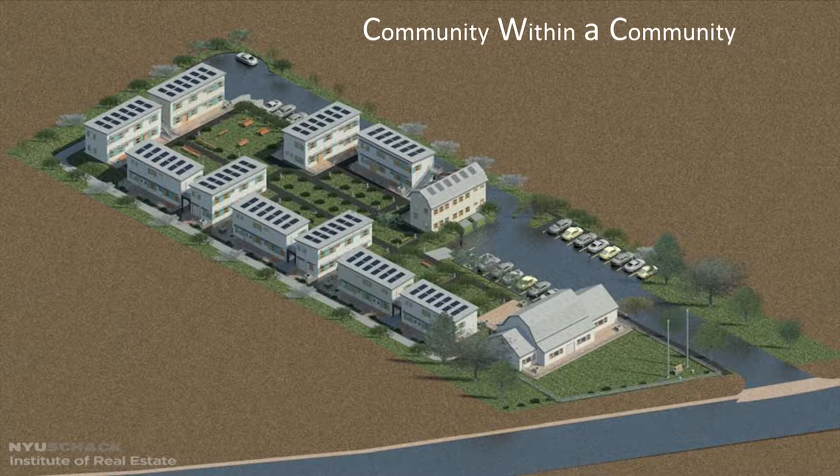So let me get started. We designed a community within a community, the DeBaun Veterans Community. The goal here was to provide something that would be not only beautiful aesthetically, but also create a public and private entity. While doing that, we also wanted to take three things really in mind, what we call a triple bottom line: social, economic, and environmental impact.

In terms of public to private, the DeBaun House is an existing structure dating back to 1770. We wanted to preserve and renovate it, having it as a community facility where organized events could happen, where the veterans can use it, and where the American Legion Chapter 269 would have a beautiful new home for their meetings. So that's the DeBaun House.

Next is the Recreation Center, or multi-purpose facility. It's going to have a small office for two caseworkers, a small storage facility for veterans to put their belongings, a classroom for essential skill development classes, a computer lab, and a small lounge area where they could watch a ball game together. Veterans can come together in one place.

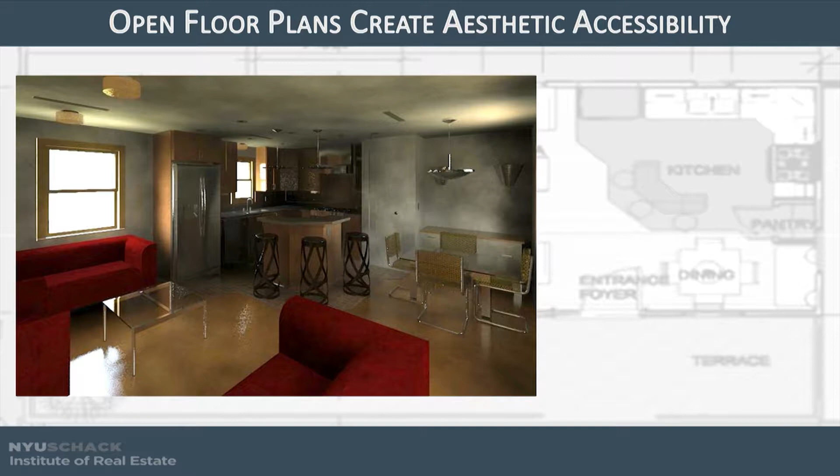I'll go into the interior. We provide ideal units with interior space management, fewer interior dividing walls for better distribution of natural light and cross ventilation, an open kitchen concept that allows accessibility to components and usage, and ideal ADA design components in bathrooms for wheelchair users, including wall mount sinks, close coupled ADA eco toilets, and ADA bathware fittings.

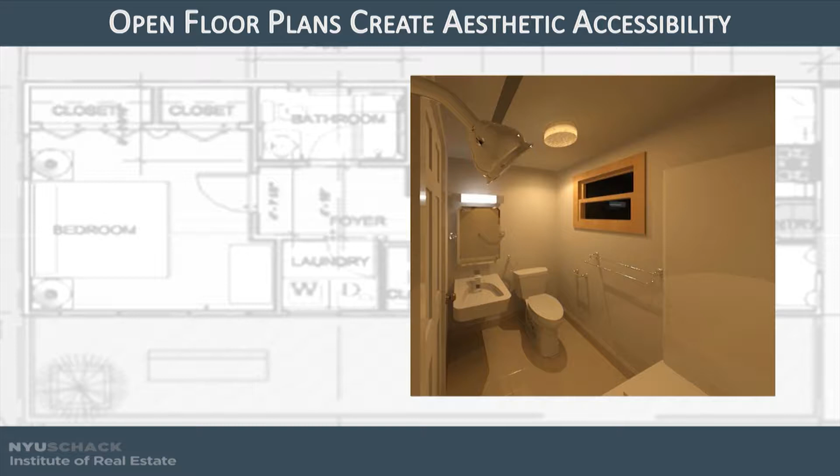The open floor plans and modern design features give the units ease of use for residents, with cross ventilation in units with standard living space. Now I'm going to hand over to Aaron to speak about the operations.

Because we are dealing with veterans, while developing the conceptual ideas for this project, it was hard to imagine what these people need first. We had the opportunity to speak with Colonel Tom Griffin, who does veterans housing in California. We found him and interviewed him, and he told us we've got to get back to the basics with these veterans. With his inspiration, we were inspired to create a multi-phased program toward self-sufficiency for the veterans who will be living here.

So we started at the DeBaun House. There are a few small things on the DeBaun House renovation that will require some help.

And for the veterans who are able to work on it, under the assistance of veteran contractors, they'll be able to recreate the porch the original house had, which we think is really neat.

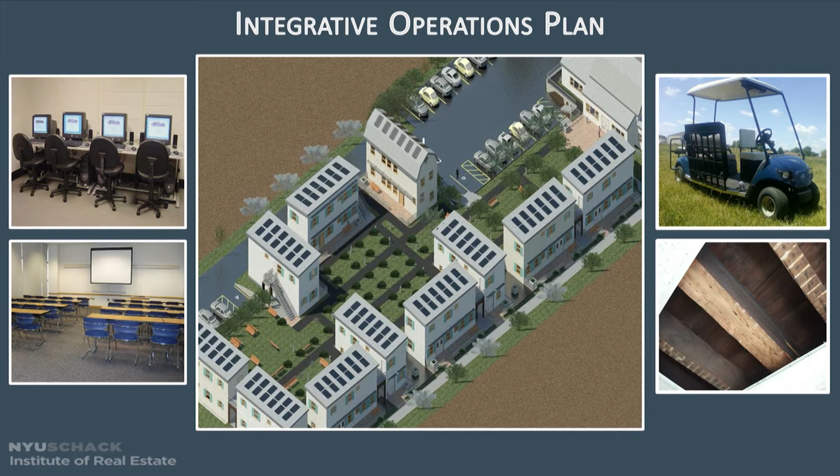In regards to occupying the space, we did have an additional unit here which we removed. We didn't want to put them together and cluster them up like army barracks, because we felt that would be a disadvantage in terms of recuperating. We wanted them to feel like it was their own home, with privacy, but also accessibility to a large public space.

You mentioned the staffing would include 2 social workers. What organizations would you imagine partnering with in terms of getting services to residents? And do you also anticipate a private property manager in addition to the social work staff? Yes, I actually forgot to mention that.

There were 3 employees that we hired: 2 social workers, one part-time and one full-time. The full-time worker would reside in the renovated DeBaun house. The upper floor is actually living quarters, so to save on cost, we would renovate that, and instead of providing a full salary, we would subsidize their salary for living wages. And another part-time worker.

In terms of operating subsidies, which we weren't able to touch on due to time, we looked at the VASH voucher program as well as Section 8. We came to the notion that if we allocated 10 vouchers each, that could help with full-time staffing as well as rental subsidies. We would also have a part-time repair person, a super. We did work that into our numbers, and that's all in the pro forma.

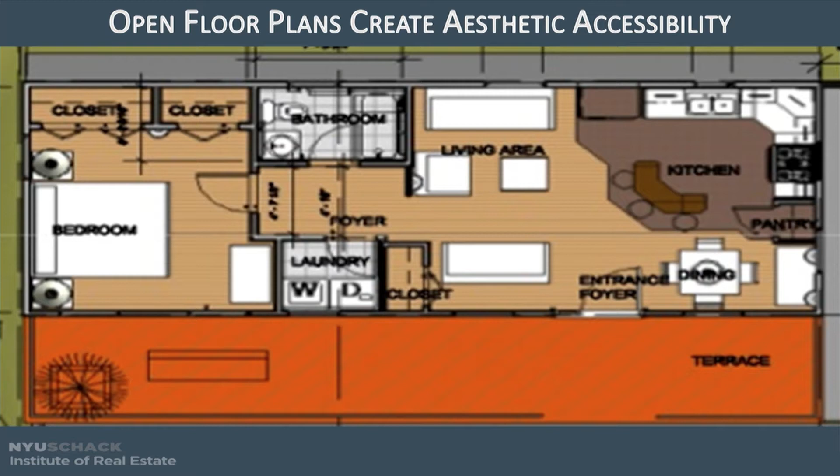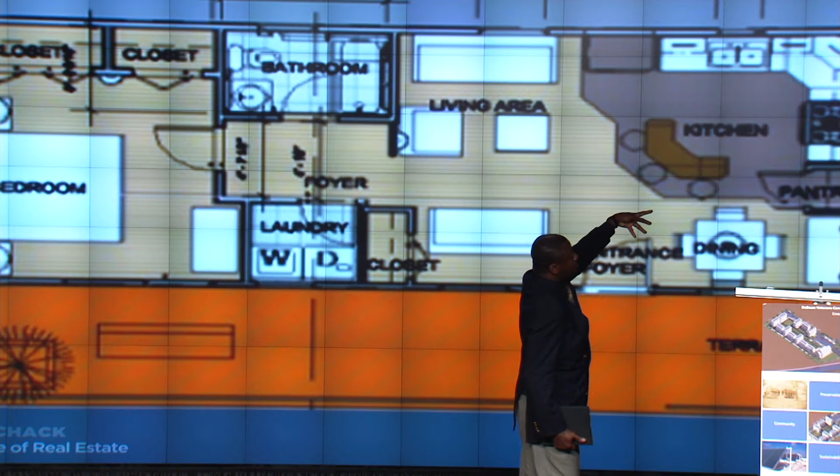Yeah, can I have the plan? This is the unit layout. We have the bedroom on this side. For cross ventilation, we have 2 windows here, 2 openings here, and then 1 on this side, so that provides cross ventilation to this unit. That's the living room right in the middle, with 2 openings. We have the door, and the dining space with windows here, then windows at the back which we have room to double. The kitchen is open, with an opening here and an opening there. So there is complete cross ventilation and natural light coming in.

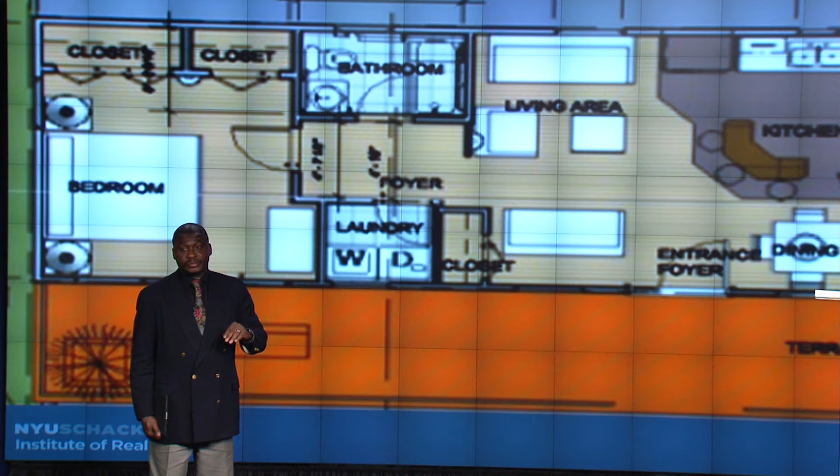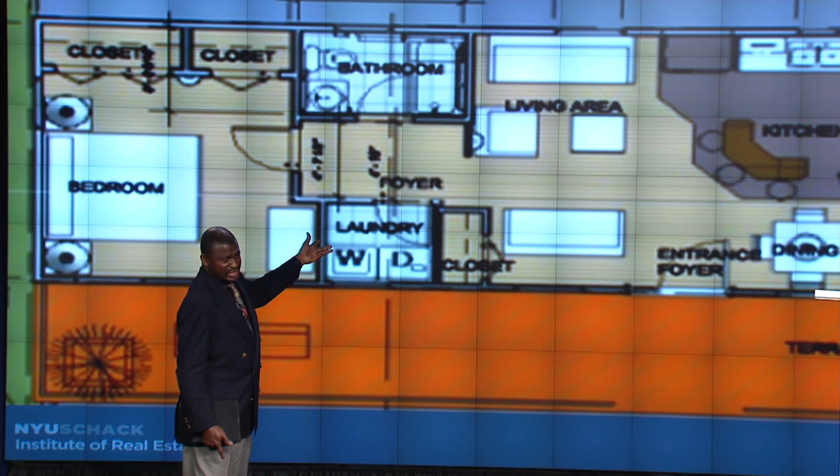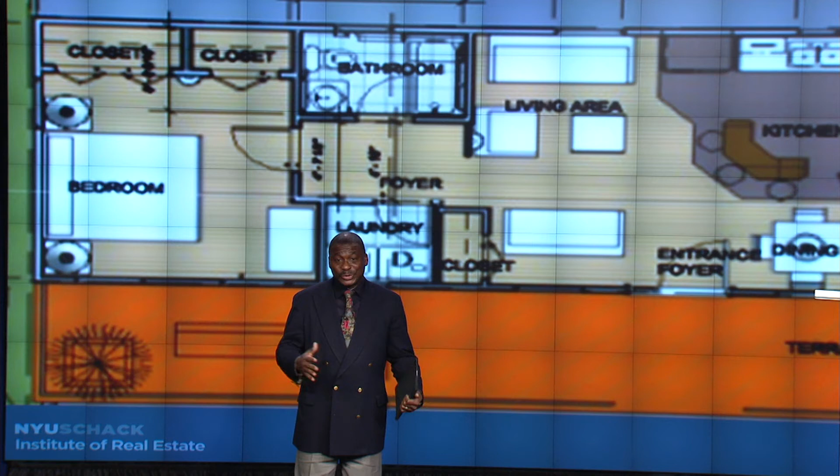How big are those units? How large are those units? It's 480 square feet.